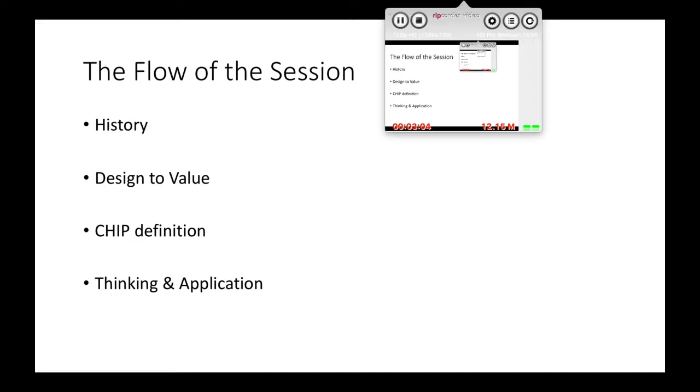Another trend was in systemized design, and systemized design for me is about, if you take a building, dividing up a building in a different way. The way we construct and think about the design and building of buildings is often via the different trades. So we think about the structure and the cladding and the piping and the HVAC system and the electrical system. Systemized design cuts the building in a completely different way. It really started because of looking at how you delivered buildings and looked at functional units within the building which would come together to make the whole unit.

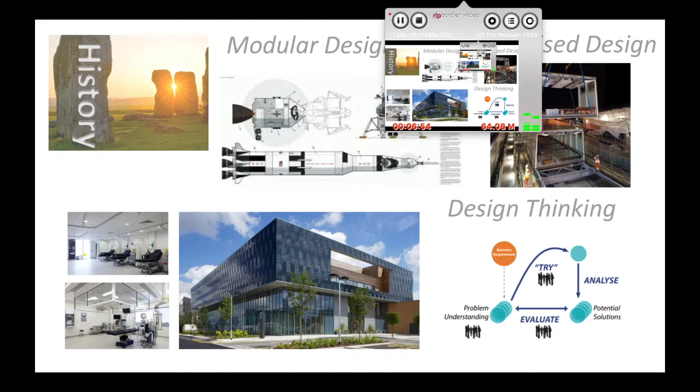So what this started to do is design thinking becomes about breaking down the problem, what you're trying to do, into its value components, and then iterating different ideas, modelling different ideas in order to get the most out of it. And that's really where chip thinking came from.

So design to value is just what I've been talking about. It's about understanding what the product, idea, service, offering is required, well understood in the delivery of products and brands, not really used in the built environment much. The opportunity may be a difference between the performance now and performance in the future, or the capacity now and capacity in the future. But then it's understanding what the real value you're trying to create in making that change.

And there's different categories of value. So there's clearly financial value, so the capital cost, which is a big focus, net present value, the margins. But there's also a value in what I've called the quality of the design. So that might be the brand, the impression, the aesthetics, the adaptability, the flow, things that may well have a financial impact but are quite difficult to quantify, but they're really valuable and need to be understood. And then there's obviously social values as well, around environmental impacts, things like decarbonisation, whatever.

But it's really about trying to understand what the values are, how you're going to measure them, how you're going to weight them, how you're going to balance the value of cost, affordability against margin, that sort of thing. And then what you're looking for is how value flows through it. So how value goes from the customer to maybe the supplier, maybe to the manufacturer, and then understand also where people hold the shared value. So efficiency of the whole system might be a shared value, and where there are differences in value. So classically, customers want affordability, and retailers often want margin. So there's a play-off there, and understanding how that will be played off is important.

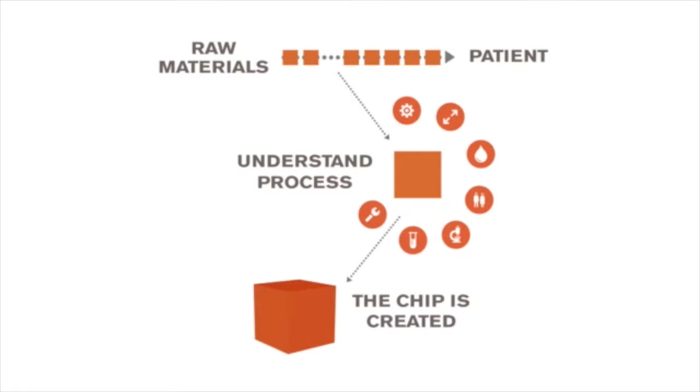As you can see, chips at that point were presented quite importantly as quite a physical thing.

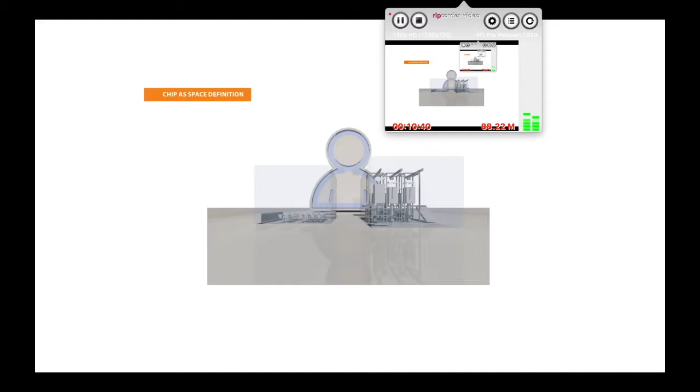So a bit more about chips. Chips are clearly a space definition, and that's important in the built environment because often the built environment is about creating places to do things. So it's really important, but it doesn't just define the size of the space, it defines the quality of the space, etc., which start to inform what's required from a utility perspective, etc.

It's a unit of operation. Something happens there, either a piece of equipment or a person or an operation, and that operation can be defined by that chip.

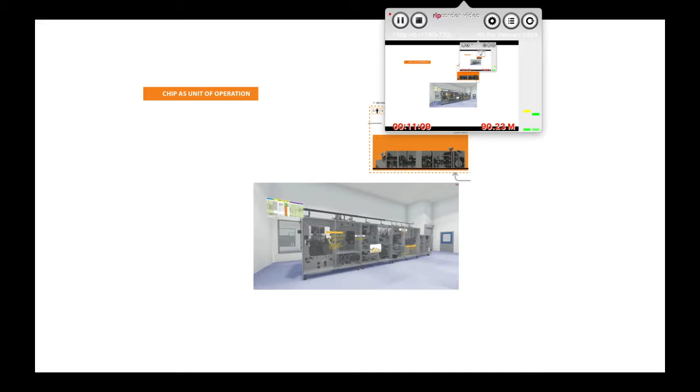It then becomes a method of rapidly building virtual environments because it becomes data rich, and it can become data rich in aesthetic and modelling terms, so you can start to put these things together really quickly and have a look and see what that might be like in reality. And that's fantastic for getting feedback.

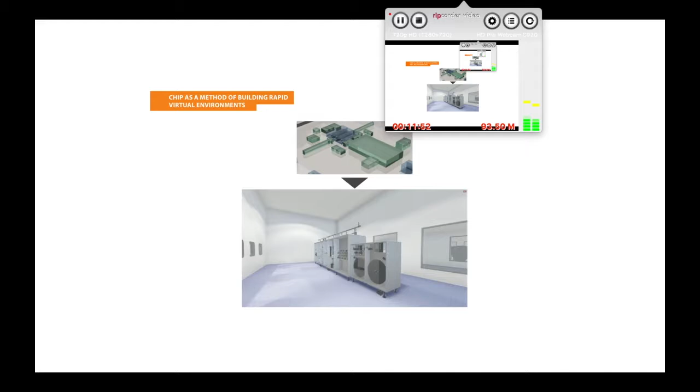Asking somebody what they want is not a very good way of getting an understanding of that. For me, the most important thing is to present something, to get them to interact with something, and through that conversation with them and that response, you get a much better understanding of what people are really looking for, and that can inform massively the design process.

So capacity modelling: each chip would have its own capacity model to understand what can go through it and its constraints, but then you put them together and you build up an overall capacity model which allows you to look at supply chain modelling, through factory modelling and through unit modelling. And then if the supply chain is not performing, you can really understand which chips you need to work on and what you might do within those chips to unlock it, etc. So it provides that whole understanding of capacity.

And the real value that we've seen in this is to allow companies to phase investment. So understand how they can phase investment over time, which does affect construction, because you need to be able to construct in a way which allows further construction and additional space to be added later without impacting the facility. But if you understand the value of doing that, even if there's some costs associated with it, it might have a fantastic return in the long term.

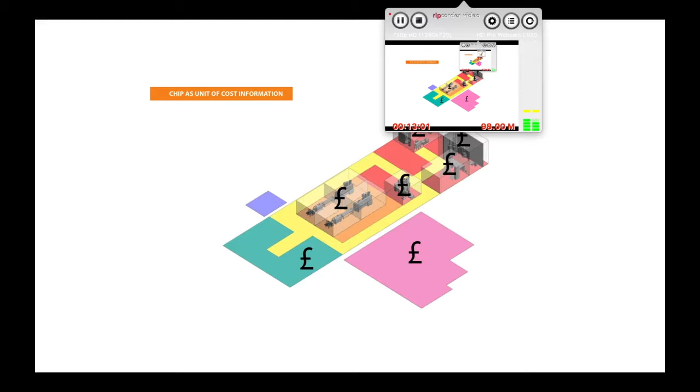Chip as unit of cost information. We do cost of goods analysis, margin analysis, NPV for all different scenarios. It allows you to play tunes and really understand how you can manage cost, where cost really lies in a process. Because of the nature of the way that the data is stored, you can understand that and work through it.

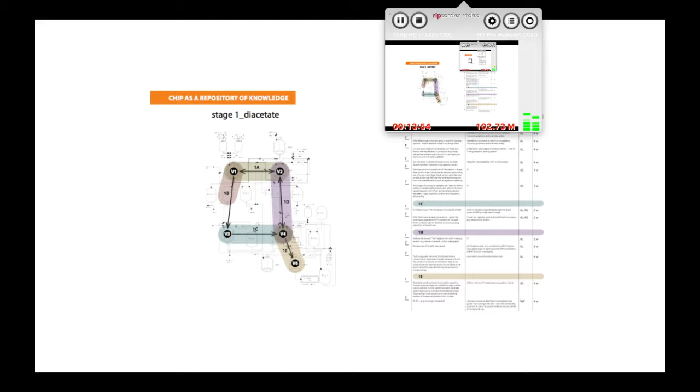It's a repository of knowledge, so as well as capturing a design and maybe an equipment list or whatever, we capture the rationale around that, so it provides a huge amount of knowledge of that process, how the process operates. Ultimately you can put the operation sequences in there, etc. So it provides a place to put all the knowledge about that value adding step within your process.

And it's a unit of consumption, so if you want to understand your utility requirements now, in the future, how they might change, whatever, the chips know what utilities they need, and with the modelling, capacity modelling, etc., you can look at peak and average demand and all those things and play those things off if energy costs are important, etc. So it helps you with energy and utility strategies.

It understands what people are needed to run the chips, and therefore as you start putting the ideas of an investment together, you start to understand what sort of people you need, how well trained do they need to be. You can start thinking about your supervision. It gives you data on things like office space requirements and canteen facilities, etc. So it's about the people as well, and understanding the human resources required to run facilities or infrastructure.

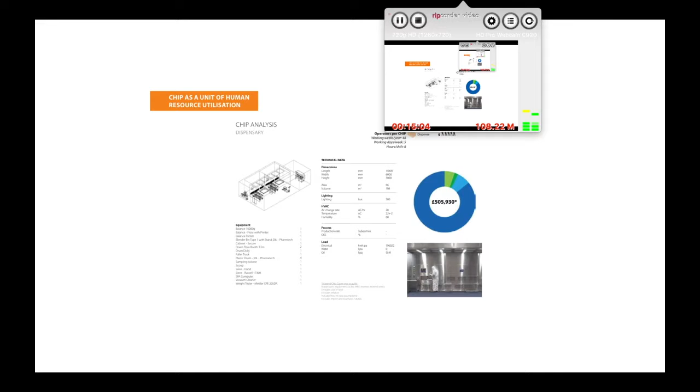And critically for many businesses, it creates an area of standardization. They can decide to standardize on chips, which reduces massively the cost of waste, of inconsistency, and so on, and allows them to repeat things within their supply chain where that's value added to them. And of course, it provides all the data to do that, and stops them redesigning things every time.

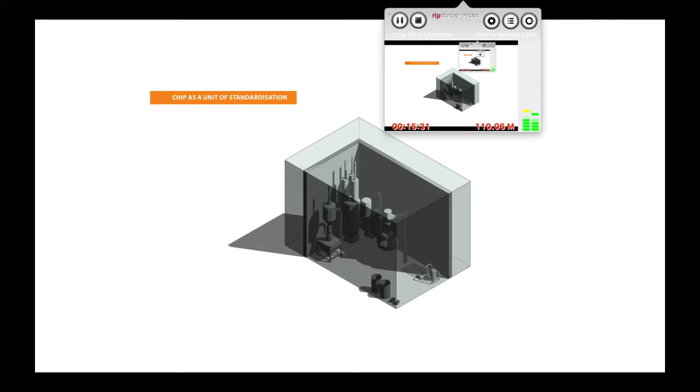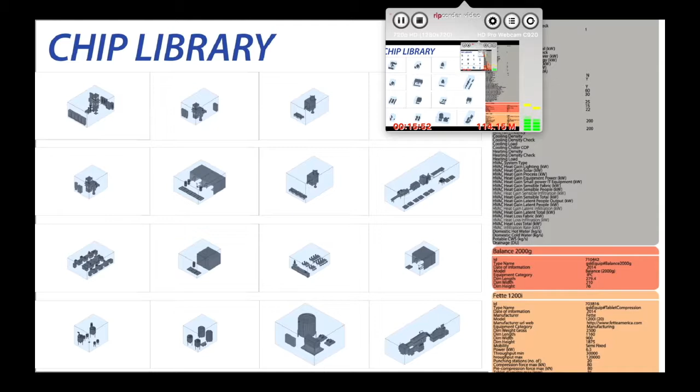So I'm going to talk you through a little video here which sort of pulls all that together. It shows how we've created a chip library and how we can use that to investigate a project. So this is our chip library, and if you go into each chip, there's a whole raft of data associated with that chip. And then when a project problem comes in, an idea, what we can start to do is put those chips together to understand how we might meet those capacity models. You can see some parametric design chips there.

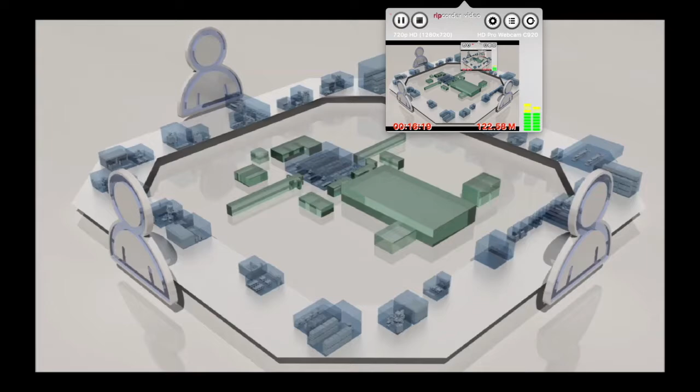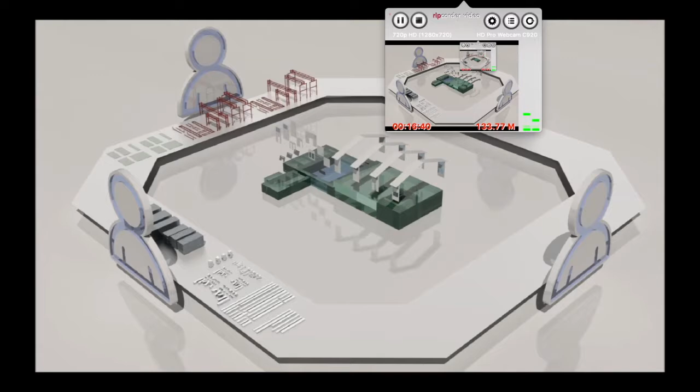So if you understand the capacity model and the flow of product through the facility, etc., and the demand, you can look at the warehouse space and access corridor space and so on. Those are sort of calculated chips. And then utility-wise, because each chip understands what utilities it requires, you can use tools to automatically look at utility runs. Not perfect, but really good for costing. This is a standardized component building system you can put on top.

So you have everything you need now to do a financial analysis, capital costs, running costs for a different product range, and you can create an iteration. You can now play again with the same component parts with a different thing and create very rapidly another iteration and show the difference. So fantastic for looking at options on projects, and much more rapid process than if you do it in a traditional way.

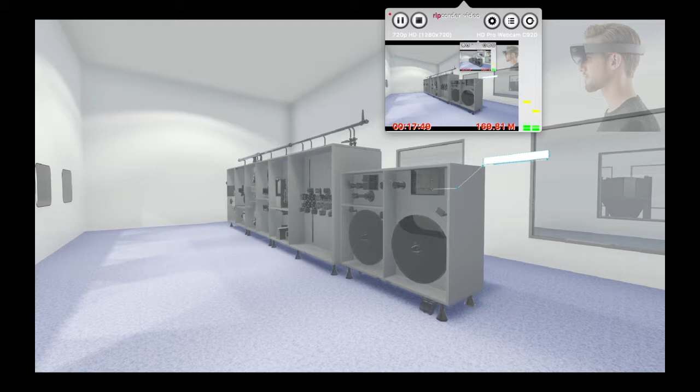And then finally, because you have lots of digital data built up around these, and using games platforms as we do, putting the data into a game platform, you can, even at these very early stages, walk into it. It's a fictitious facility, but it's one based upon a section of chips that are put together. You can walk into it, have a look. This really starts to inform people, and they'll ask lots of questions, have different ideas, and those can all be reassessed back into different requirements which weren't understood, or different aspects of value which hadn't come through previously. So really valuable in early design.

So chip thinking is about using chips to understand how value flows and how you're going to design a built asset to maximize the value for a business. And a chip for one person can be their supplier of product at a margin which is really good for their sales, or it can be the data required for someone who's planning utilities on a site, and everyone in between. Just some examples of where we've used chips and chip thinking.

This is an example where the company was looking to build a new drinks facility in Africa. They briefed a company. The company had gone off and done a design, feasibility design, and when that came back, it was much too expensive and the business case didn't make any sense. We brought this into front-end factory. We broke the process down into chips. We started to look at what products we might leave in their existing factory and what products we might put in their new factory, how those products grew over time.

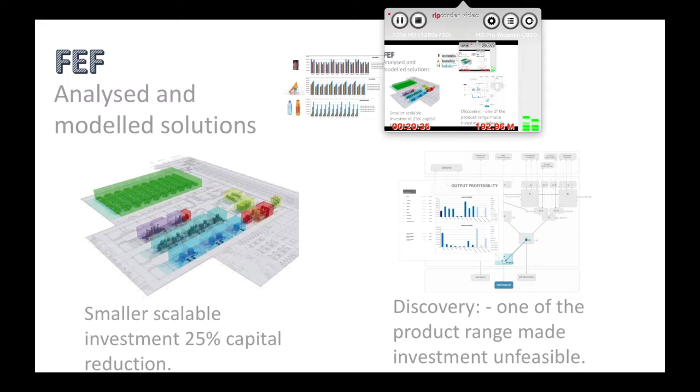Another example of this was when we were looking at building many facilities in emerging markets potentially, and they all had different functions, all in the secondary region, so turning drug substance into tablets or liquids or whatever, but all of them different. So we looked at all the different chips that would be required all over the place, and then what we thought we need to do is to put an adaptable construction system around those, which could be built in any market cost effectively, rapidly, but also without use of construction people, because each area had very different levels of capability in construction.

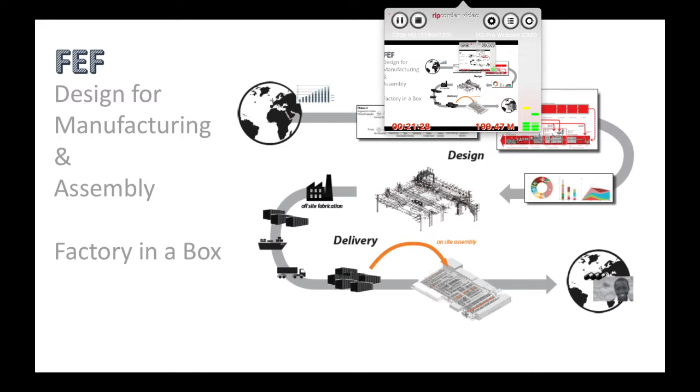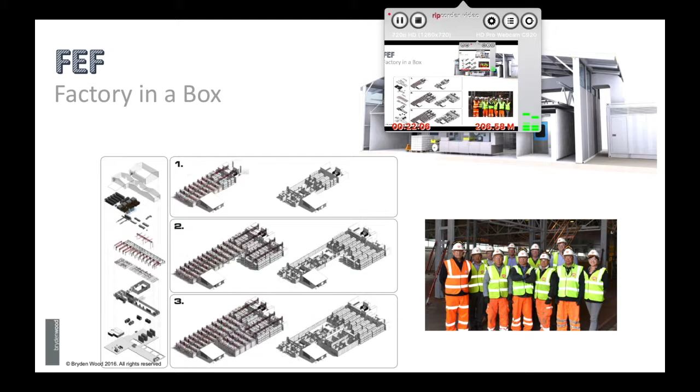There was huge amounts of variation in size, and facilities could grow over time or repurpose because it was a very adaptable system, and none of it would need construction people. In fact, we tested it by prototyping with a group of ex-Gurkha soldiers to show that it didn't require construction people to build the facility, and it was signed off by our quality people.

Chip thinking now keeps evolving, and one of the evolutions that came out was to look at the classification of chips. So I've talked about chips really at this sort of logical unit of transformation, or logical unit of value creation. But if you go up, chips of course organise themselves into facilities. And what we call a facility is a collection of chips which sits within a particular site. So it creates a facility to do with that value chain, and it's a number of chips. And of course that's how businesses really work.

Going up another level though, a macro chip becomes a node in a global supply chain, in a global value chain, and you can at that level start to model strategy, those strategic decisions, and we call those macro chips. Moving down from the chip, you've got the meso chip, and that's a logical subunit of a chip, and they once again can fall out of thinking and design.

The real benefit we saw in the meso chip, though, is that's often where standardization really starts to work for you. So there's often quite a lot of pull on variation in chips, which really only changes the data, particularly in the early stages when you're modeling. So that's not a real problem. But in design terms, that can become quite a complex thing. Whereas if you go down to meso chips, the sort of subcomponents, you can create quite a lot of standardization and build chips up from those more rapidly. So it's a really valuable piece of work.

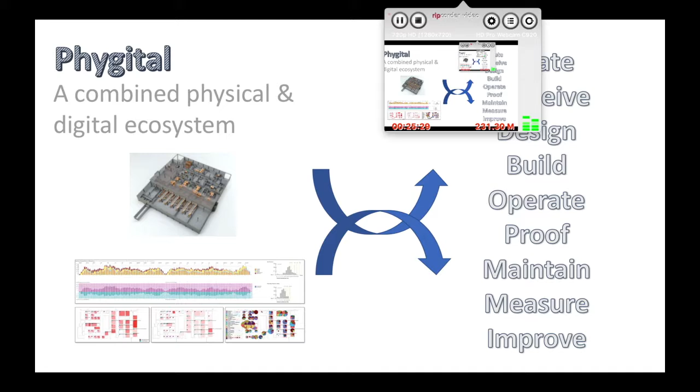The modular concept is key to what we are doing. We start with a basic toolkit of different reactor types and different separation technologies. Then we modularize those into standard building blocks. Like Lego, we can put those blocks together to execute a recipe.

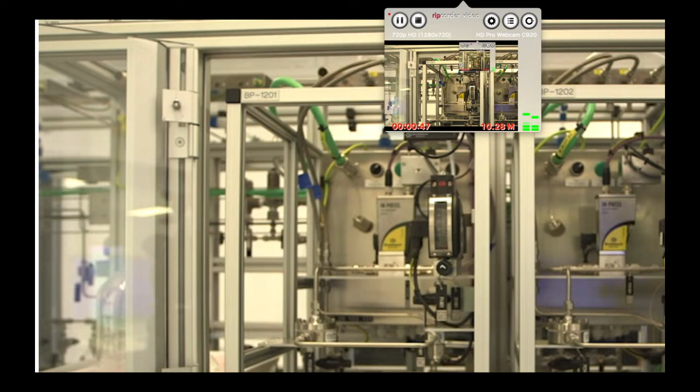80% of these blocks would be workhorses that we would use again and again, and over time we get an ever more expansive library that we can rapidly assemble from. With this high level of standardization combined with a fit-for-purpose diversity, not only will we be able to react very quickly to demand, but we'll get precision and more reliability in our supply.

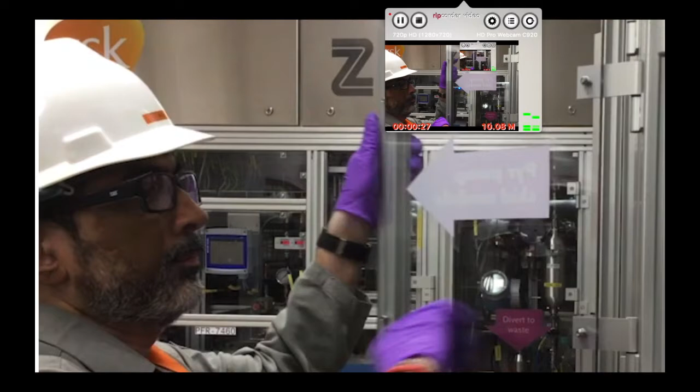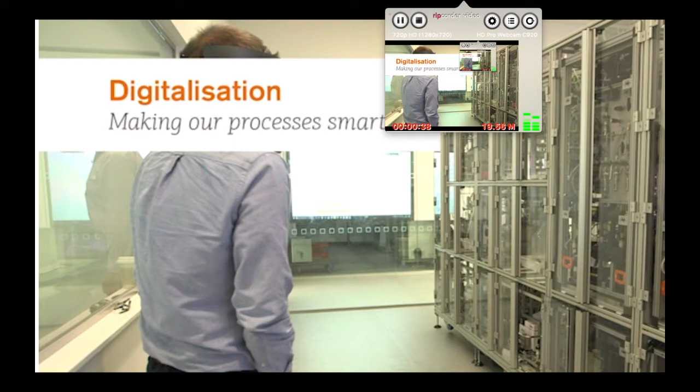The continuous batch hybrid platform is a manufacturing platform that combines traditional technologies with new ones for higher performance and data integrity. But it only works when we digitalize what we are doing. By creating a digital twin of a manufacturing facility, we can really bring to life a new way of manufacturing products.

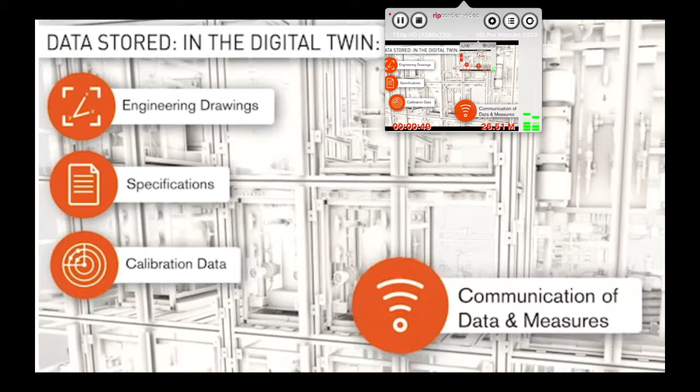We can release our finished goods more quickly, reduce downtimes, and prove to regulators in real time that our product is compliant, ensuring higher performance throughout our supply chain. Chips are really about holding data, about those moments in a process or value chain that add value. And the digital side is really important in terms of the learning organisation.

So GlaxoSmithKline has developed chips which it has access to at different levels of design, some of them at detailed design. It has a building system, understands the components and the quality of the components and how they can come together to make rapid and cost-effective buildings. It can analyse those in its portfolio and understand where they can add most value and where to spend time in standardisation to deliver future value, and stores knowledge about its processes and its network as time goes on, which is very rich in terms of future strategizing.

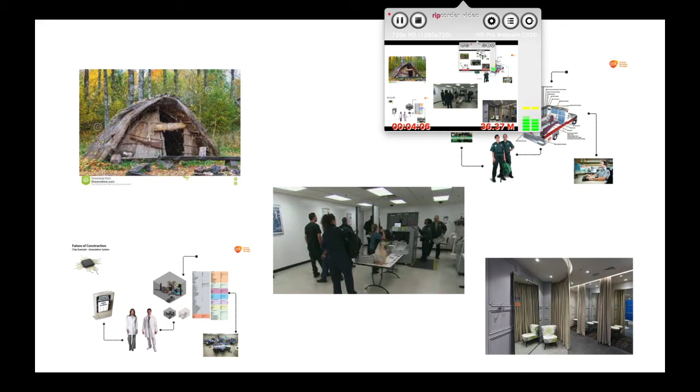And then a changing room here in a retail store. That's really important because not only are you trying to change your clothes and you want to be able to do that in relative comfort, maybe involve someone else in the choosing of the clothes. You have some value propositions there, but the company also wants to demonstrate something. In this case, quite a plush one, wants to demonstrate its brand and so on. So that is a chip, and that has some very different values for both the company and the customers. So chips are all around us.

So I hope you've enjoyed our little dalliance through chips and chip thinking.